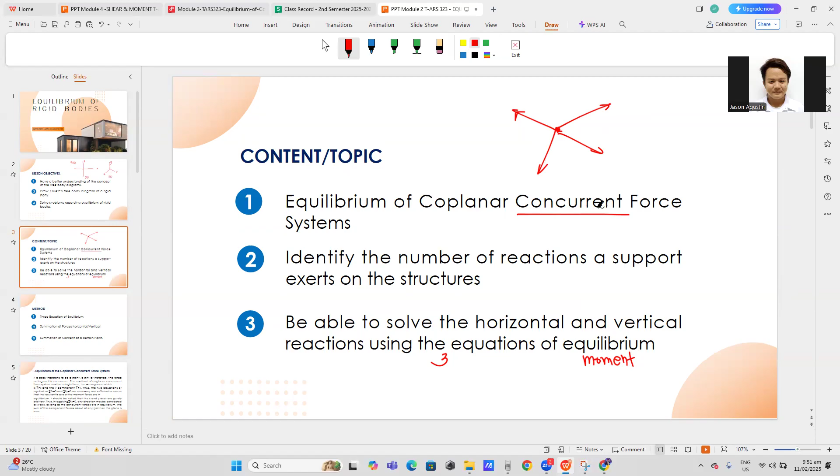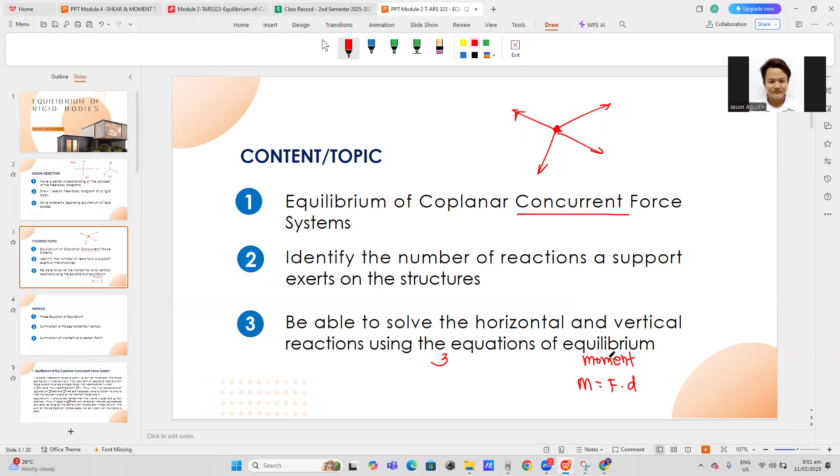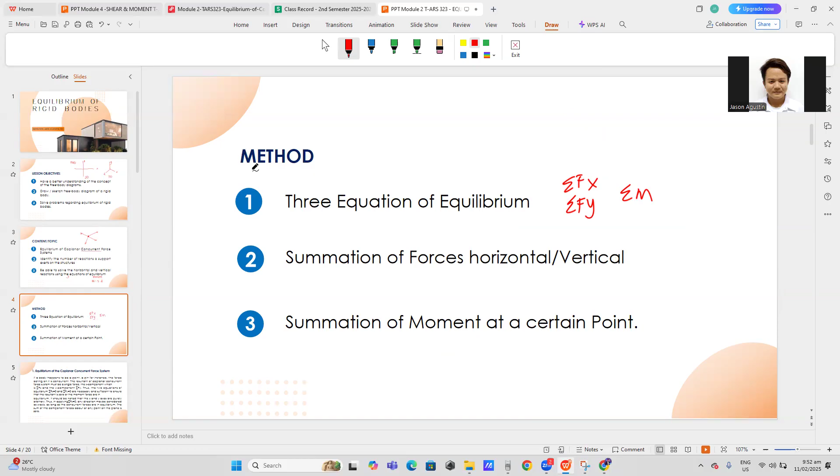So, method natin is yung three equation of equilibrium. So, yun yung summation of forces X, summation of forces Y, and summation of moment. Okay? Then, ito yung method natin, summation of forces horizontal, and vertical, and then summation of moment at a certain point. So, magsiset tayo ng reference natin. So, topic 1 tayo: equilibrium of the coplanar concurrent force system.

So, ito yung una, yung parang spider web. No? So, sabi niya dito, if a body happens to be a point, a pin for instance, the force acting on it is concurrent. So, kunyari ito, nakapin siya dito, no? Then, meron tayong mga forces dito. So, applicable lang itong equilibrium of coplanar concurrent force system kapag dalawa yung unknowns natin. So, pwede siyang dalawang forces yung nawawala. Pwede siyang isang forces and isang angle. Okay? And then, sabi niya dito, the resultant of coplanar concurrent force system must be a single point.

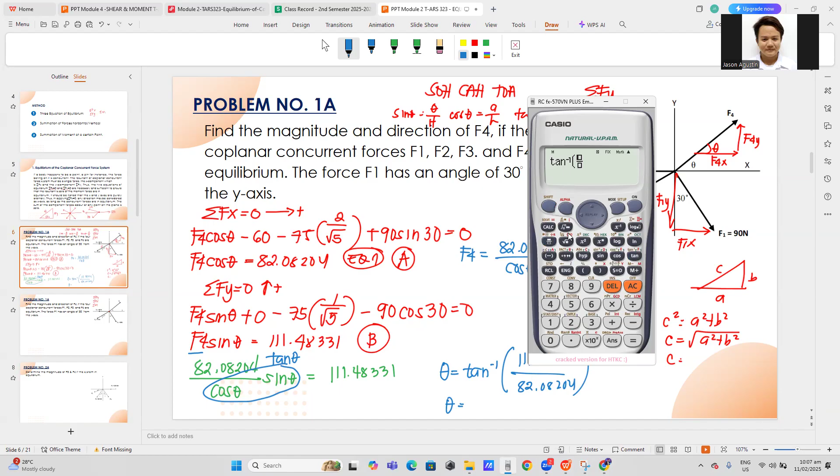So, arc tan. Yung ano natin, sa taas natin, where tayo, letter B yon and then A. So, ikakalk lang natin 111.48331 and then 82.08204. So, we have here 53.63682. Ngayon, stored lang natin yan sa letter C. Letter C ng calculator natin.

Ngayon, meron na tayong value or direction niya. Nakuha na natin to direction. Kunin naman natin yung magnitude. Kayo bahala if saan, doon sa equation 1 or equation 2. So, pakita natin sa equation 1. Ito yon, no? Lagay ko lang dito.

Aware ako na yung 82 ko is yung A all over cosine theta. Yung theta ko is letter C. Yan. So, enter ko lang. So, o ano ko muna, i-check ko muna kung nandun yung value. Ikakalk ko, yung A ko is 82. Then yung C ko is 53. So yung sagot natin is

138.44128. So ito na yung value ni F4 natin. Okay, so ito na rin yung sagot natin isa.

Paano naman kung equation 2 yung ginamit natin? Kulay green na dito. F4 equal to 111.48331 or yung letter B natin all over sine theta. So lilitaw dito, parehas sila. Ayan, parehas sila.

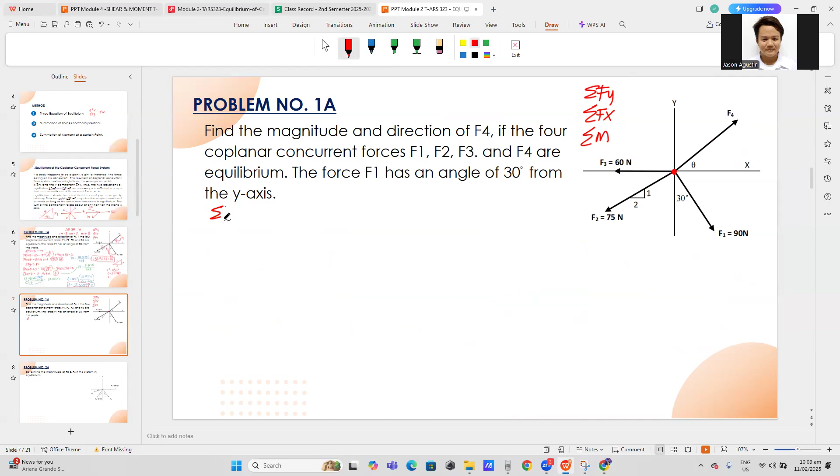So dito tayo. Ang ginawa lang natin dito, summation of forces x equal to 0. Lahat na papuntang right ko is positive. So yung F4 ko, lalagay ko lang dito is F4x. So aware ako na x component yan. Pero kanina ginawa ko is cosine siya. Ngayon, apply lang natin lahat yung ginawa natin kanina.

So negative 60 ito. Then negative 75. Then meron tayong 2 all over square root of 5 to, tama ba? Yan, square root of 5. Then positive 90. Yung relation niya is ano siya, opposite. So, meaning sine to. Sine 30 equals 0.

So, yung F4x ko is equal to, yan pa rin naman yung kanina, di ba? Wala naman nagbago. Different approach lang naman yun. So, ito yung alpha A ko or stored ko ulit sa alpha A. Ayan. So, 82.08204. So, letter A yan, no?

So, ngayon, summation of forces y equal to 0, upward ko is positive. We have F4y, positive yan kasi nga upward siya. Then, we have negative 75, 1 all over square root of 5, minus 90 cosine 30, equal to 0. So, yung F4y ko is equal to, so, dilipat ko yan magiging positive.

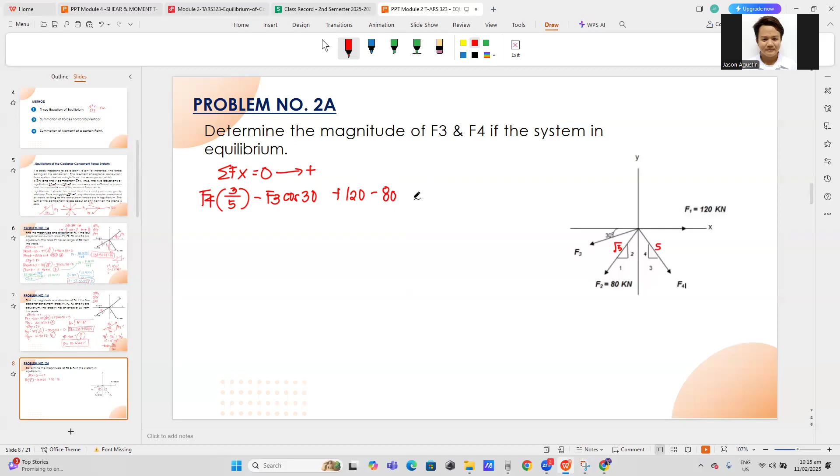So plus 120, since it points right, then minus 80 since it points left. And what's its X component? It's 1 over square root of 5, equal to 0.

So for F4, the value of 3 over 5 is 0.6. Let's just divide, so it's 0.6, minus F3 cosine 30. Now I'll transpose this, including their sign. So this 80, negative 80, becomes positive. So 80 times 1 over square root of 5, minus 120.

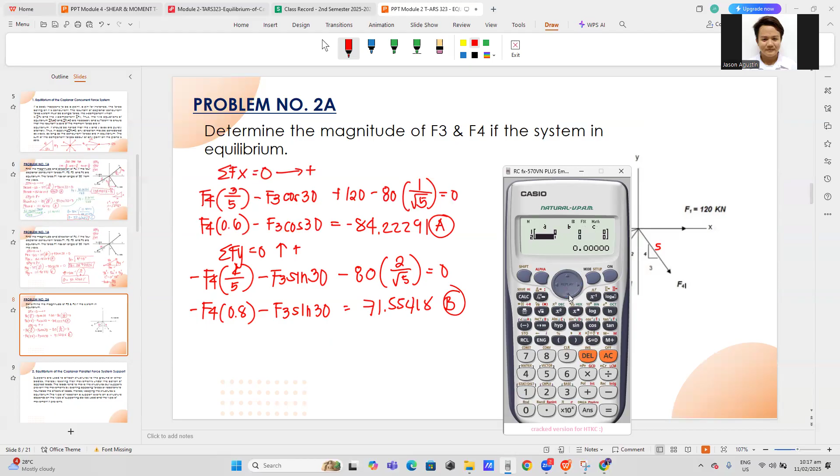How do we calculate directly? If your calculator looks like this, go to mode, then equation. There, number one, two equations two unknowns. So it's A, B, C, meaning our equation is AX plus BY equals C.

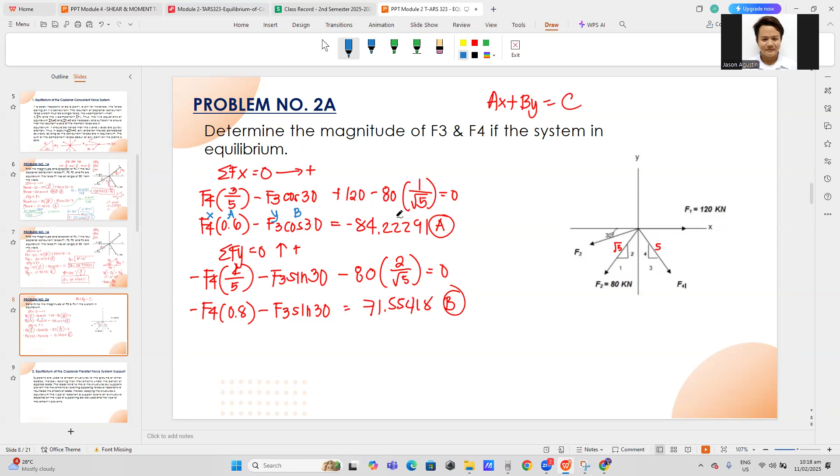Where A is the coefficient of X, and B is the coefficient of Y. So this becomes our X. Let me draw it out. This becomes our A, this becomes our X, since those are our unknown values. Then here, this becomes our B, the cosine term, this becomes our Y, since F4 and F3 are unknown. And C is the constant.

Okay, let's just input this. Take note, it needs to be arranged: F4 should go in column A, F3 should go in column B on the calculator, and C is our constant. So 0.6, then negative cosine 30.

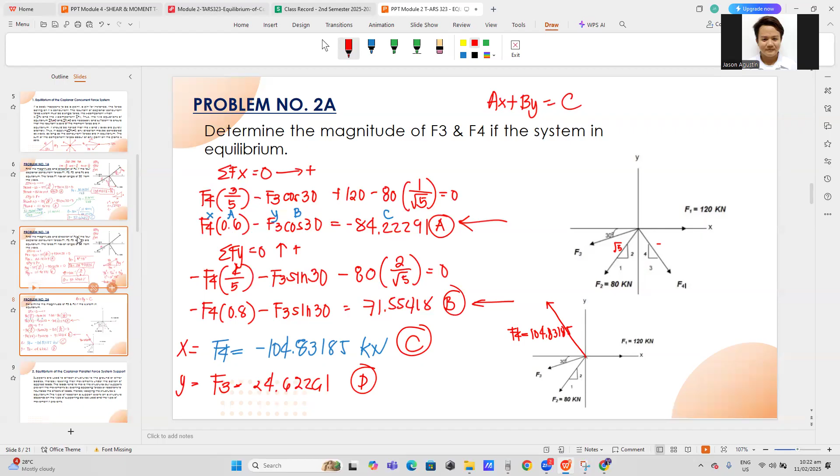Support are used to attach structures to grounds or other bodies, thereby resisting their movements under the action of applied loads. The loads tend to move the structure but support prevents the move by exerting opposite forces or reaction to neutralize the effect of loads.

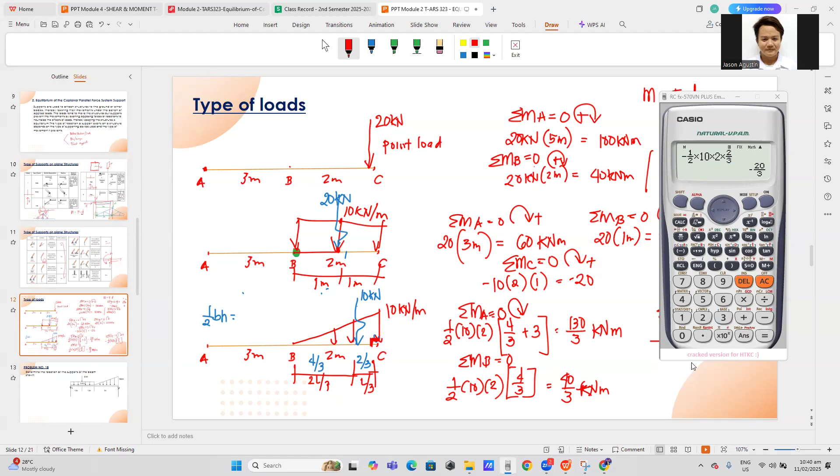Paano naman kapag nag-moment at C ako? Moment at C, lahat ng clockwise ko is positive. So ngayon, yung rotation niya from point C is negative. So negative 1 half, 10 multiplied by 2. Distance niya is yung 2/3 natin. So we have here negative 1 half multiplied by 10 by 2 multiplied by 2 over 3. So negative 20 over 3.

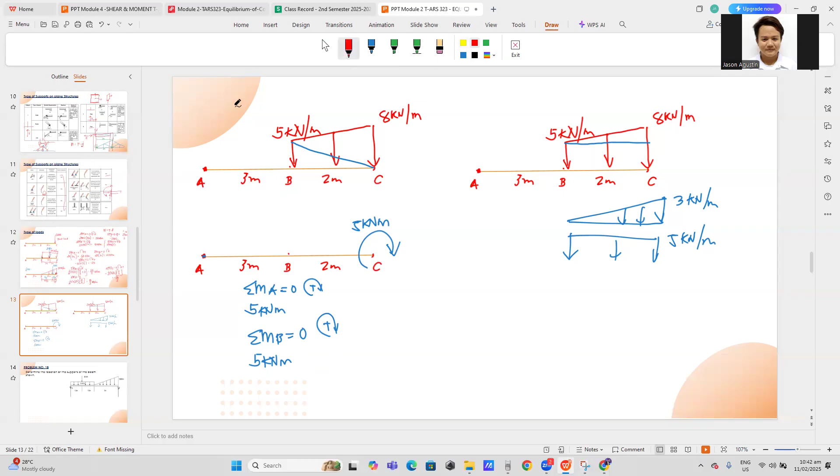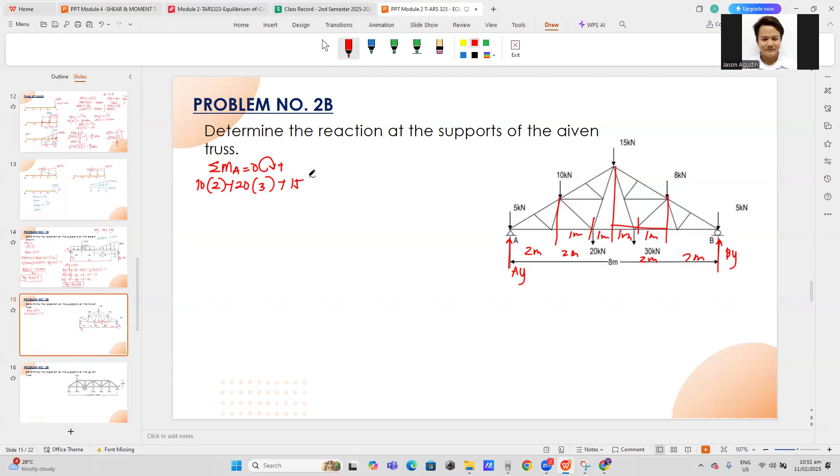So, summation of moment at point A equal to 0. Clockwise ko is positive. So, yung 5 na to, wala siyang distance, so 0 yan. Dito tayo sa 10. So, 10 multiplied by, ang distance niya is 2 meters. And then, itong 20 natin sa ilalim, ang distance niya is 3 meters. So, plus 20 times 3 meters. Then, yung 15 natin, plus 15, distance niya is 4 meters.

Then, itong 30 natin sa ilalim, distance niya ilan? 4 plus 1, plus 30 times 5 meters. Then, yung 8 kilonewton natin, plus 8 kilonewton, distance niya from point A is 6 meters. Then, yung 5 natin sa dulo, plus 5 times 8 meters. And then, yung BY natin, yung ikot niya is counter. So, negative BY multiplied by 8 meters equal to 0.

So, yung BY natin times 8 meters equal to, calculate ko lang yung value na to. And take note, class, nilipat ko na siya, so lahat ito positive. 10 multiplied by 2 plus 20 multiplied by 3 plus 15 multiplied by 4 plus 30 multiplied by 5 plus 8 multiplied by 6 plus 5 multiplied by 8. So we have 78. Okay, double check na lang.

So 20 plus 60 plus 60 ulit plus 150 plus 48 plus 40. 78? Ano mali ko kanina? So 10 multiplied by 2 plus 20 multiplied by 3 plus 15 multiplied by 4 plus 30 multiplied by 5 plus 8 multiplied by 6 plus 5 multiplied by 8. So, 378 siya. I-divide ko lang ito ng 8. So, we have 47.25.

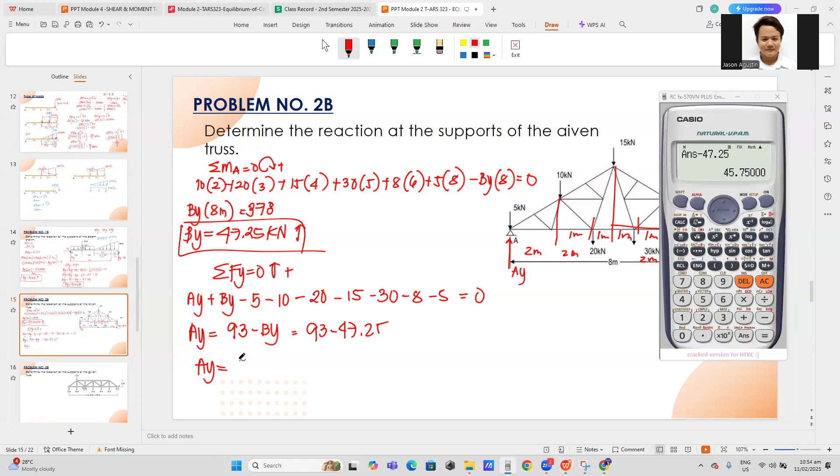So, yung AY natin is equal to, nilipat ko lang lahat ng negative, 5 plus 10 plus 15 plus 20 plus 30 plus 8 plus 5. So, we have 93 minus BY, or 93 minus 47.25. So, AY is equal to 45.75 kilonewton upward. Basta alam nyo kung paano umiikot at yung mga distance, kayang-kaya i-solve to.

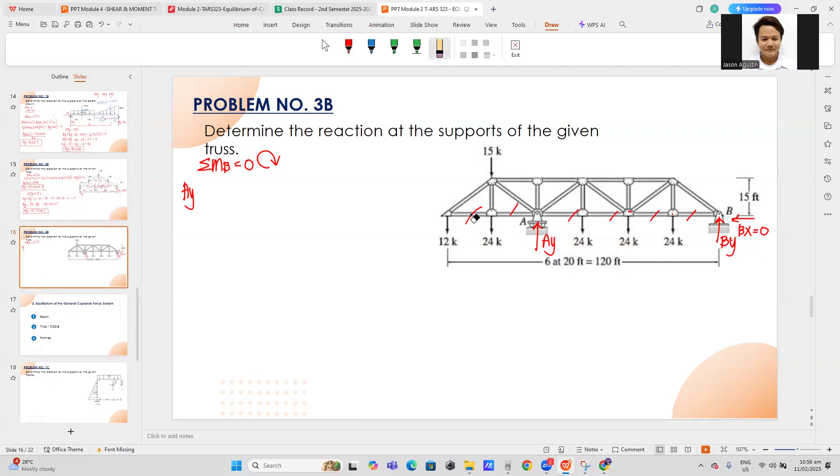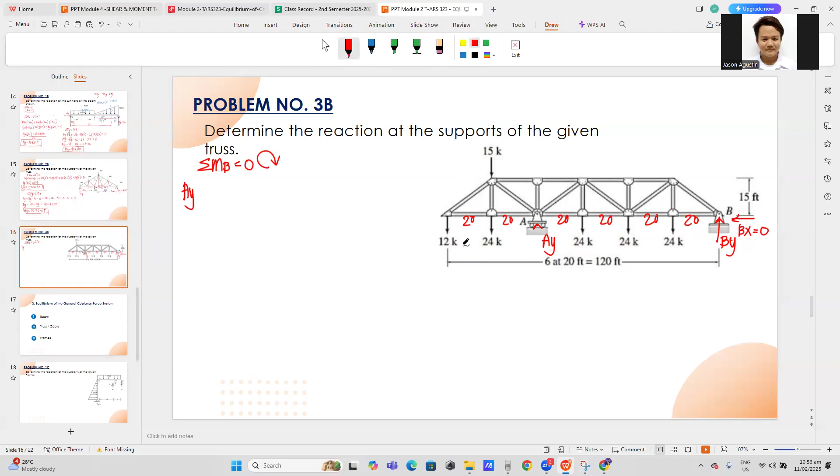And then, what about our forces? All of them are counter, so negative 15 or 12, let's say 12. Its distance from point B is 120. Since they have the same distance, we can add them. So negative 15 plus 24, then multiply by 100 feet.

Then let's go to the 24, 24, 24 - the fourth 24, so negative 24. Its distance from point B is 60. So the second one, or the second 24, negative 24 multiplied by 40. Then next is negative 24 multiplied by 20 feet equal to 0.

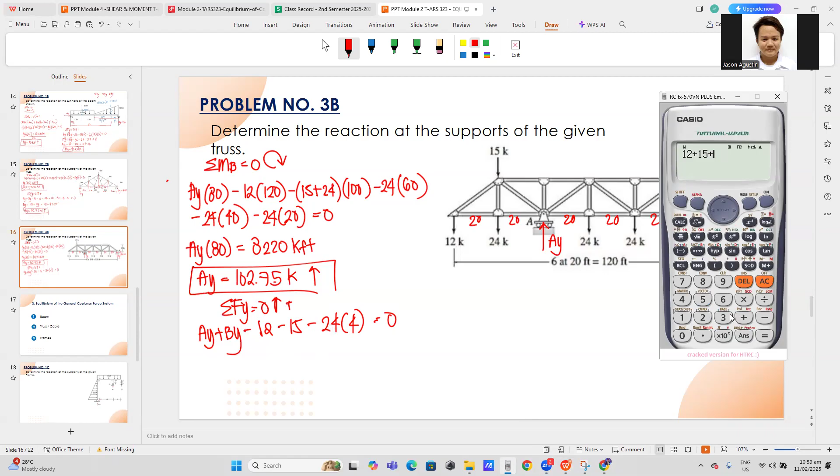So let's move all the known values. So 12 plus 15 plus 24 multiplied by 4, we have 123. So AY is equal to 123 minus BY. That's BY, what we're looking for. Reversed.

So BY is equal to 123 minus 102.7. So our BY is equal to minus... we have 20.25 kips. Since it's positive, our assumed direction is correct.

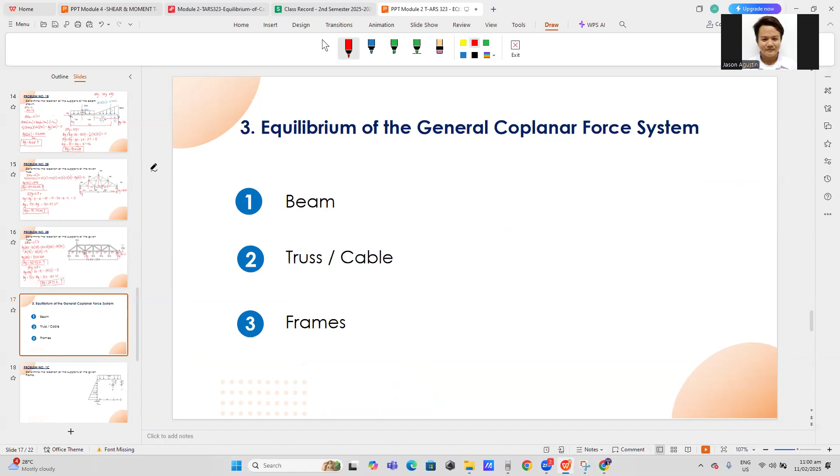Okay, so what's our last topic for this module? Equilibrium of general coplanar force system. It includes beams, trusses, cables, and frames - all of those, including our horizontal and moment equations. Let's go to our next problem.

Problem number 1: determine the reaction at the supports of the given frame. So this is our frame. Now let's identify the values. I see this is 18 feet, and this is also 18 feet.

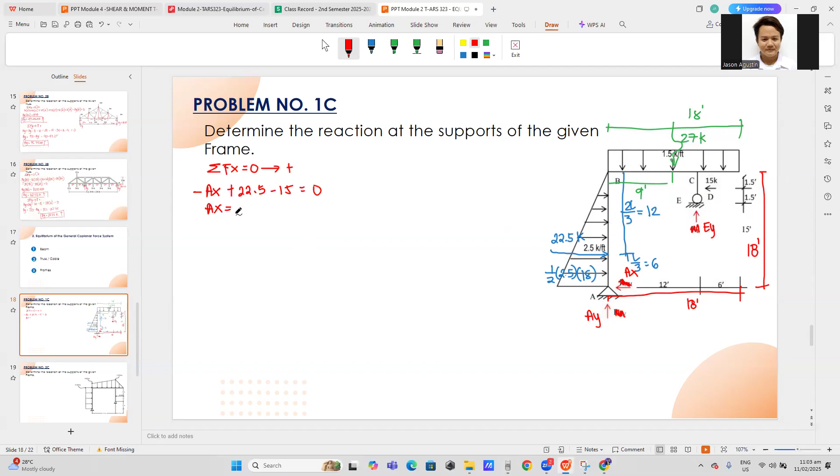Now, summation of forces X. So we have negative AX, since it's going right - actually going left. Then the right one is this triangle, so plus 1/2, or let's just use the 22.5. 22.5, then minus 15 equals 0. Then AX is equal to, moving the minus, 22.5 minus 15... we have 7.5 kips, and it goes to the left.

Ngayon, magmo-moment na tayo para makakuha tayo ng isang reaction. Summation of moment at point A equal to 0, clockwise ko is positive. Unahin ko muna yung triangle. Yung triangle natin is 22.5, and distance niya from centroid to point A is 6 feet. Mas maganda kung marunong kayong mag-sketch para di kayo malito.

Yung rectangle naman is plus 27, distance niya from point A is 9 feet. Then yung 15 natin, minus yan, minus 15, distance niya from point A is 16.5.

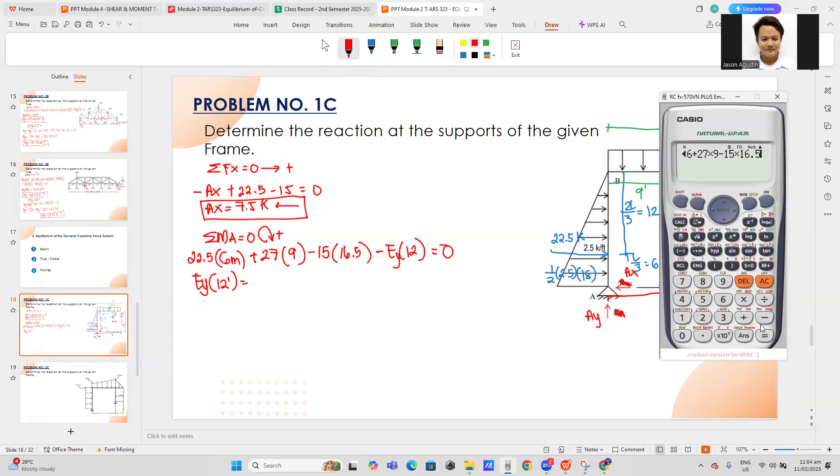Yung EY natin, yung ikot niya is counter din siya. Negative EY multiply by 12 equal to 0, so makukuha natin yung EY natin. EY multiply by 12 feet pa to. 22.5 multiplied by 6 plus 27 multiplied by 9 minus 15 multiplied by 16.5. So we have 130.

Let me just double check, baka kasi mali. Tama naman. 22.5 multiplied by 6, plus 27 multiplied by 9, minus 15 multiplied by 16.5. We have 130.5 k feet to.

Divide lang natin siya ng 12, kasi nga distance ni EY from point A is 12. So we have EY is equal to 10.875 K upward yan. Double check ko lang, baka kasi mali.

Ginagawa ko lang naman na mabilis yung ginagawa ko ngayon, wala naman akong ginagawang kababalaghan dito.

Ngayon, meron na tayong isa. Apply naman natin yung isang method, yung summation of forces Y equal to 0. Lahat ng upward ko is plus positive. So AY plus BY, at yung mga vertical natin, ito lang yung 27, so minus 27 equal to 0, kasi nga yung dalawa natin is horizontal sila. Yung AY ko is equal to 27 minus BY or 10.875.

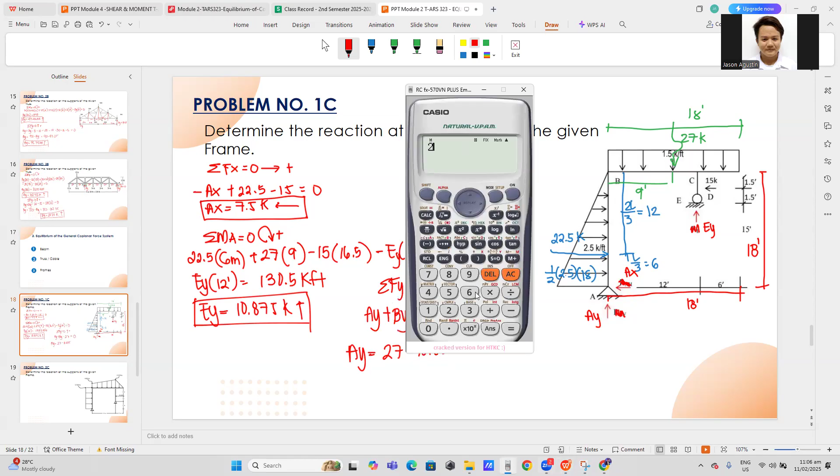27 minus 10.875. 16.125 k, upward din yan.

Kung di kayo sigurado dito, gawin nyo, mag-moment naman kayo dun sa point E. Kaso risky yon, kasi nga gagamitin mo yung value ni AX. Kapag hindi ka sigurado sa value ni AX, mali na. Mas maganda, kung saan marami yung unknowns natin, dun kayo mag-moment. Kung given lang ng forces natin or support natin is pin and roller, sa pin kayo mag-moment para dalawa kaagad yung nawawala.

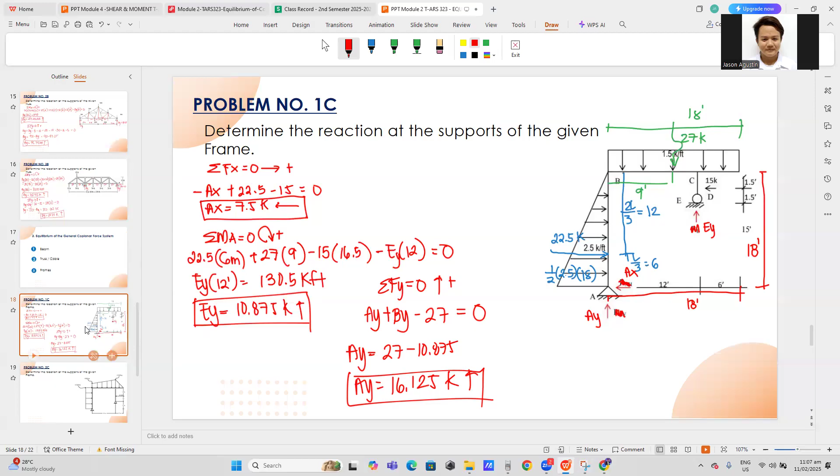Next tayo, ito. Medyo madugo to, pero kayang-kaya naman to. Kunin lang natin yung area na to, alam po ito is 4 meters to. 1.5 is 3 meter plus 1 meter, so 4 meters siya. 12 multiplied by 4 is 48.

Dito siya nag-a-act sa gitna. Dito naman, atin ko to, i-attach ko lang dito. Yung distance natin is 2.25 meters. Ngayon, anong area natin? Is 8 kN/m multiplied by 4.5, so we have here 36.

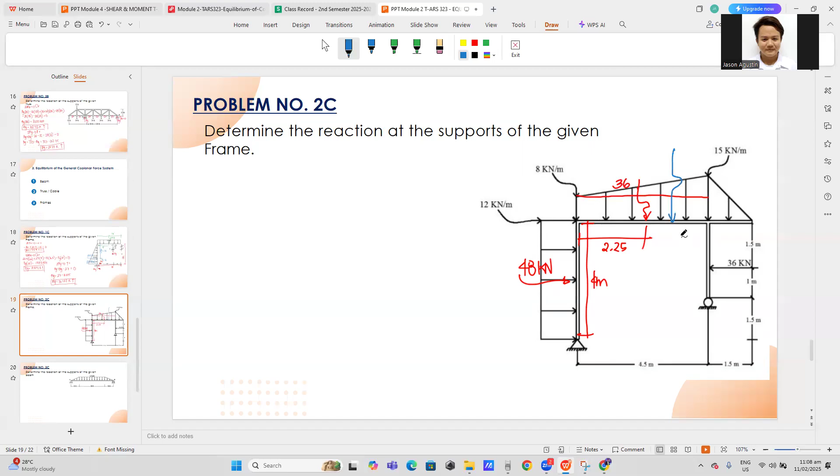Ngayon, paano naman yung triangle? Triangle natin dito siya nag-act, so L over 3, 1.5 ito, and then dito is 3 meters. Do the math, kasi nga kukunin mo yung L over 3 dito, then 2L over 3, kasi nga nandito yung mataas na triangle.

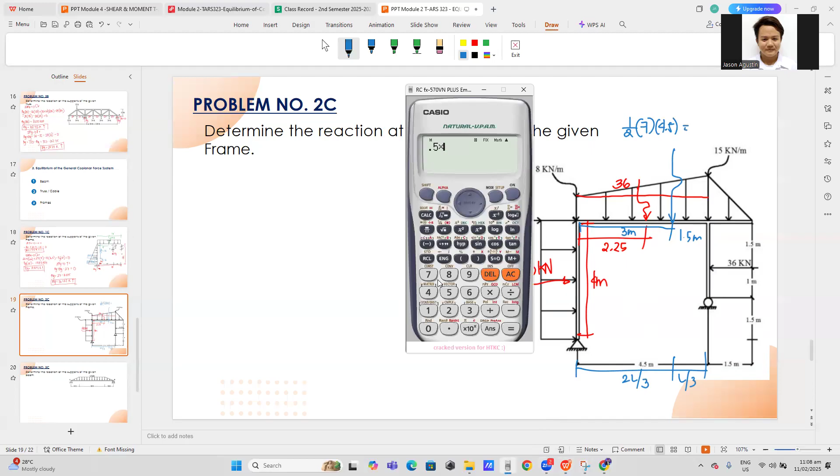Ngayon, paano natin kukunin yung triangle o yung area ng triangle? 1 half, 15 ba siya? Hindi siya 15, 7 lang siya, multiply by 4.5. 1 half multiplied by 7 multiplied by 4.5, we have here 15.75, yung value natin dito is 15.75.

Ngayon, dito sa isang triangle naman, nag-act siya dito. Nakikita naman natin by using L over 3 and 2L over 3, ito is 0.5 to 1 meter.

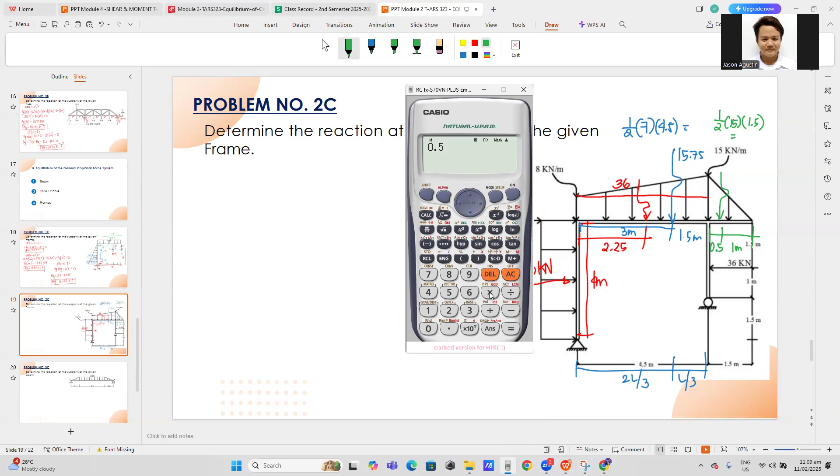Okay, ngayon, ano yung magnitude natin dito, kunin natin. 1 half 15 multiplied by, bakit 15 na siya? Hindi naman siya, triangle siya po, then 1.5. So 0.5 multiplied by 15 multiplied by 1.5. 11.25 yung magnitude niya.

Iniiba-iba yung kulay niya para ma-visualize nyo, pero kapag tayo nagsasolve, pwede rin kayo gumamit ng ibang kulay para mas maganda.

Ngayon, mag-moment ako saan? O ano muna, summation of forces X, kasi wala naman siyang kaagaw, unlike do sa vertical natin, meron siyang dalawa. 0 equal to, papuntang right ko is positive.

Ngayon, wala tayong naka-assign na point, so sabihin natin point A ito, point B ito, point C ito, point D ito, and point E ito. Ako na yung nag-assign, pero kung wala, kayo yung mag-assign. Usually, binibigay ko naman yung mga point na yan.

Sa horizontal natin, siyempre, papalitawin natin yung mga reaction natin. Itong point A natin, meron tayong pin, so meron siyang vertical, AY. Sabihin natin papuntang left siya, ina-assume ko lang siya, na AX dito. Then yung AY natin is upward siya.

Kapag mali yung direction or mali yung na-assume ninyo, and then nakuha yung value is negative, meaning mali lang yung direction niya.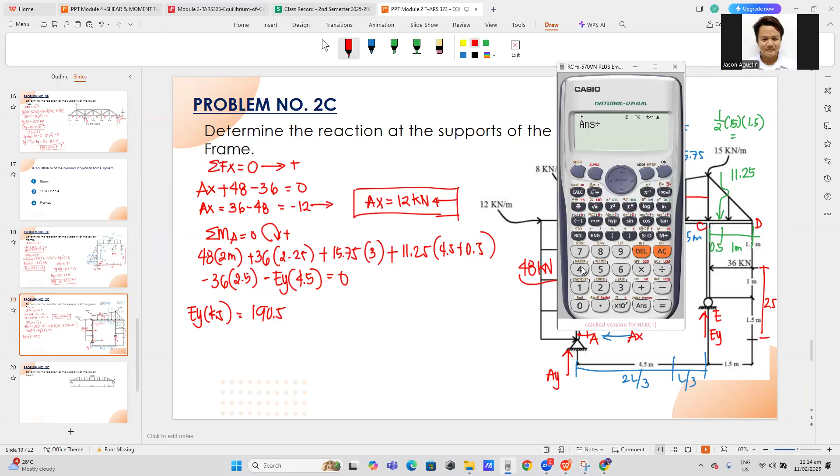48 multiplied by 2, plus, ito nilipat ko ng EY, kaya naging siya positive. So calculator lang natin: minus 36 multiplied by 2.5. Ito lang natin, so 190.5, then divide lang natin siya ng 4.5. Ayan, so meron tayo ditong EY is equal to 127 all over 3.

Equal to 42.3333 kilonewton and then upward yan. So ito na yung sagot natin isa.

Okay, ngayon yung summation of forces Y naman is equal to 0. Upward ko is positive. We have here AY plus EY minus 36, ayan yung kulay red. Then yung kulay blue natin, yung triangle is 15.75. Then yung kulay green natin, yung triangle na isa, 11.25, equal to 0. So yung AY natin, makukuha natin, pagka-add lang natin yan, 36 plus 15.75 plus 11.25.

63 siya, minus EY, so ma-minus lang natin ito, minus 127 all over 3. Mali, 63 minus 127 all over 3, meron tayong 62 all over 3, or equal to 20.6667 kilonewton upward.

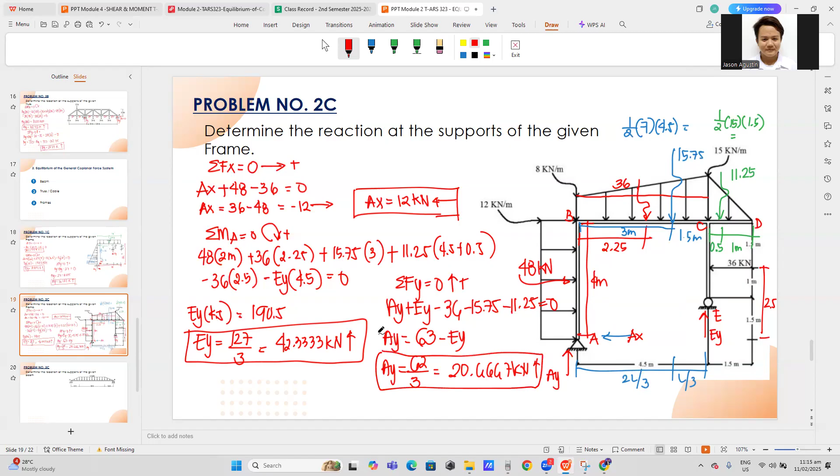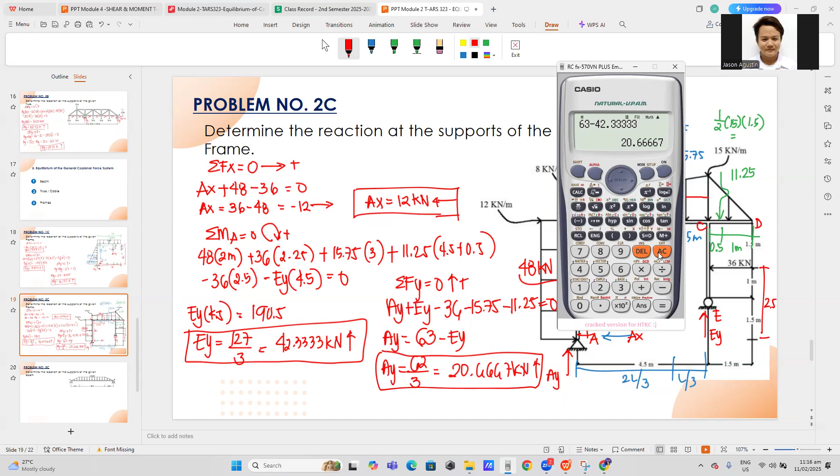Bakit yung ginamit ko yung fraction? Para walang decimal, na walang discrepancy, sakto yung sagot natin. Pero kung ginamit nyo itong decimal na to, hindi yung fraction, same rin naman. Mas better kasi nag-stored values tayo, tulad dun sa ginawa natin dun sa unang topic natin.

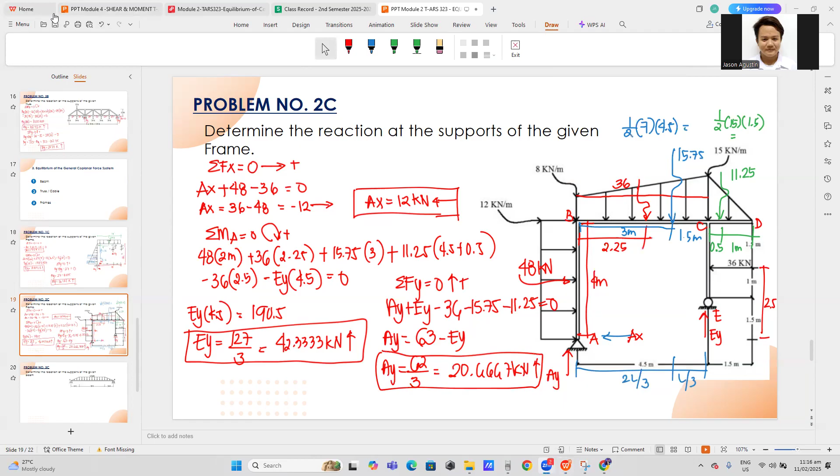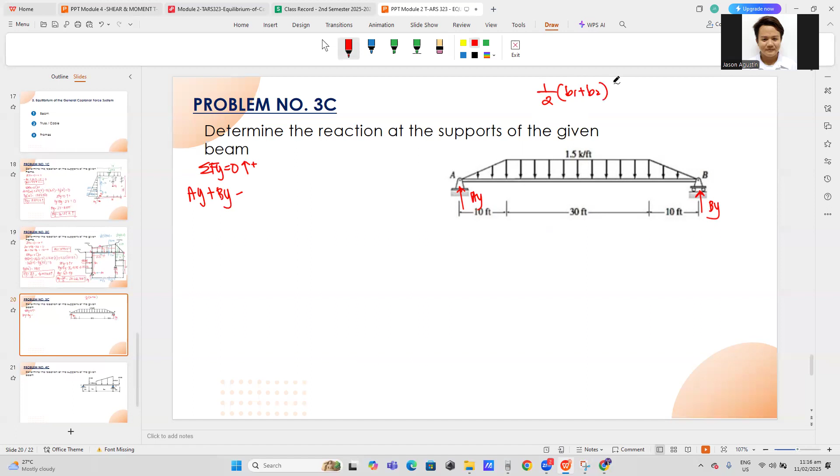So summation of forces Y lang tayo, equal to 0, upward. So alam natin, AY to, ito is BY. Dali lang to, no? Ngayon meron tayong AY plus BY minus, kasi nga downward ito. Kunin lang natin yung area ng trapezoid: 1/2 multiply by base 1 plus base 2, and then height. Yung base 1 natin, ito yon sa taas, base 2 natin, ito yon. So we have here 1/2, base 1 natin is 30, plus natin yung base 2 na 50, multiply by height na 1.5, equal to 0.

Then aware tayo class na symmetrical siya, so kapag symmetrical siya, meaning yung AY natin equal to BY. So pwede lang natin i-divide. Yung AY natin or 2AY is equal to 1/2 multiplied by 1.5 multiplied by 50 plus 30. Yan, di-divide 2 lang natin to, so 30 siya.

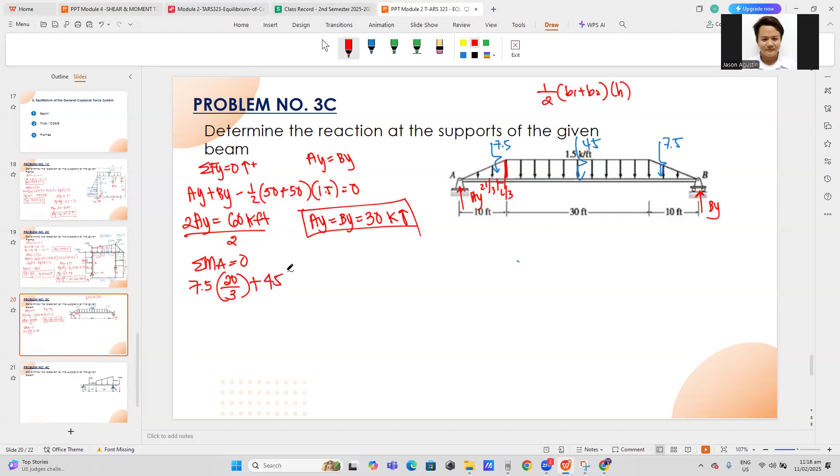So, dito, 7.5 positive yan. Distance niya from point A is 2L over 3. Kasi nga, dito yung mataas na triangle, no? So, dito yung L over 3. Ito yung 2L over 3. So, meron tayo dito 20 all over 3. Then, dito naman sa gitna, yung 45. Yung gitna natin is 25 feet from point A. Then, yung isa naman triangle is plus 7.5. Then, yung distance niya is 10 all over 3 plus 40.

Then, yung By natin, negative By multiplied by 50. So, yung By natin, meron siyang distance na 50 from point A. So, i-add lang natin to: 7.5 multiplied by 20 all over 3 plus 45 multiplied by 25 plus 7.5 multiplied by 10 all over 3 plus 40. So, we have 1,500 dito. Then, di-divide lang natin siya ng 50. So, By natin is equal to 30, sorry. Upward.

And then, mag-apply ka ulit ng summation of forces Y equals 0. Upward ko is positive. So, Ay plus By minus 7.5 minus 7.5 minus 45 equal to 0. So, yung Ay ko plus By is equal to 7.5 plus 7.5 plus 45, equal to 60. 60 minus By, or 60 minus 30. Yung Ay natin is equal to 30.

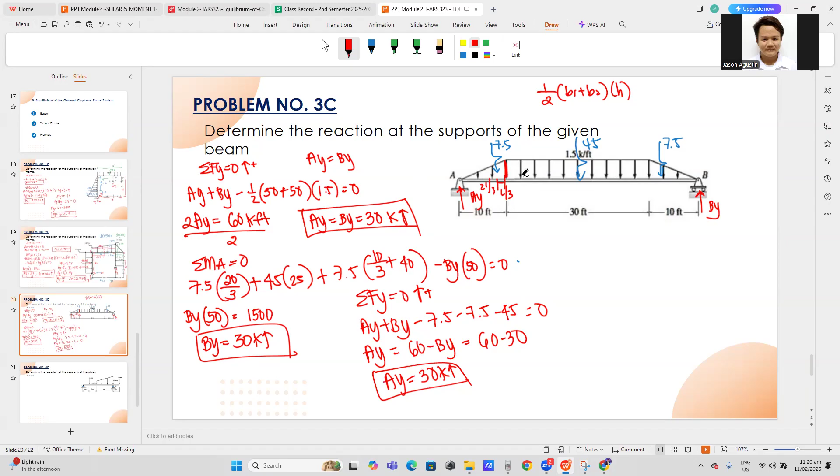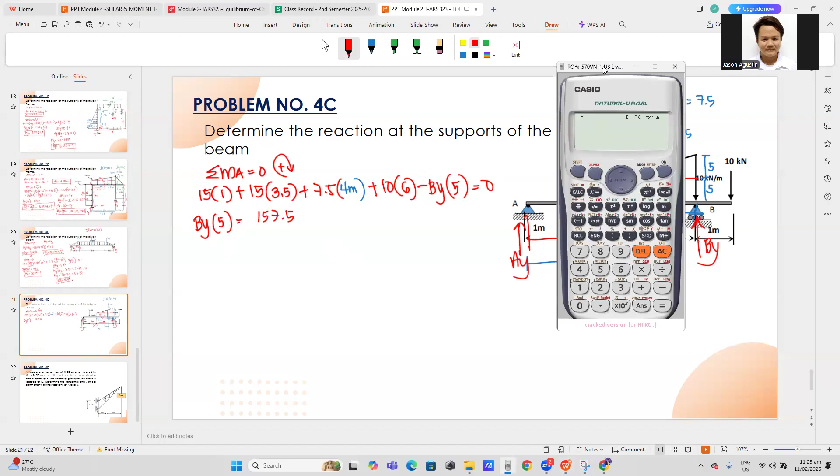15 times 1. Then ito 3.5. Then plus 7.5 multiply by 4 plus 10 multiply by 6. So divide 5 ko lang siya. So we have By is equal to 31.5 kilonewton upward. Ngayon, summation of forces Y naman tayo. Equal 0, upward ko is positive. So we have Ay plus By minus 15 minus 15 minus 7.5 minus 10 equals 0.

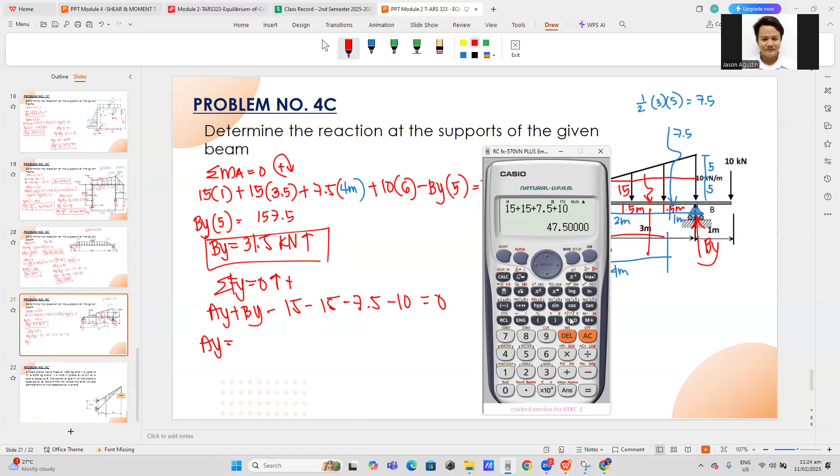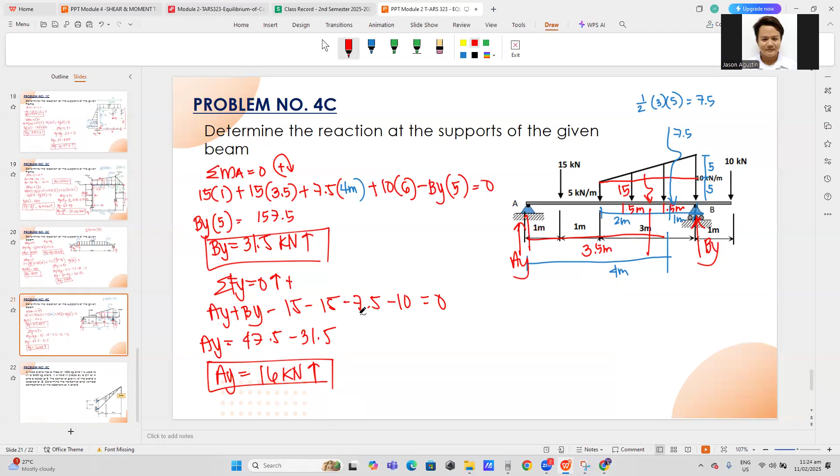So yung Ay ko is equal to 15 plus 15 plus 7.5 plus 10, so 47.5 minus 31.5. So we have Ay is equal to 16 kilonewton upward. So problem number 5 tayo, or last natin.

Dito, sabi niya dito, a fixed crane has a mass of 1,000 kg. So mass lang to, no? And it is used to lift a 2,400 kg crate. It is held in place by a pin at point A. So may point A tayo dito, point na pin, and a rocker at point B. So meron tayong rocker dito. The center of gravity of the crane is located at G. So dito daw yung center of gravity ng crane. Okay? Then determine the horizontal and vertical components of the reaction at point A and B.

So hinahanap lang natin yung reaction natin sa point A and B. So identify muna natin yung support. Ito, pin or hinge ito, point A. Then ito B natin is roller siya. So palitawin lang natin mga reaction. Ito papunta dito, yung AX. And then ito naman is AY. And then dito sa B natin, roller siya, perpendicular dun sa surface niya. So ito yung BX lang siya. Ayan.

So yung crane natin is 1,000 kg siya. Ngayon, kailangan natin itong i-convert into kilonewton or weight, yung dalawang ito, no? So 1,000 kg multiplied by the gravity 9.81 meter per second squared to make it newton. So 1,000 multiplied by 9.81. So meron tayong 9,810 Newton. Divide lang natin siya ng 1,000 to make it kilonewton. So we have 9.81 kilonewton.

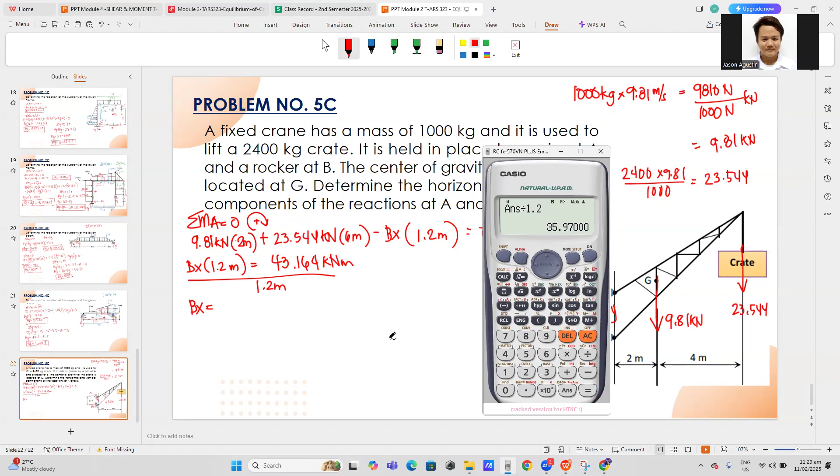So yung BX natin multiplied by 1.2 meters equal to 9.81 multiplied by 2 plus 23.544 times 6. So we have here 43.164 kilonewton meter. I-divide lang natin siya ng 1.2 meter. So BX natin is equal to 35.97 kilonewton, papunta siya sa right. So ito yung sagot natin. Tama yung assumption natin doon.

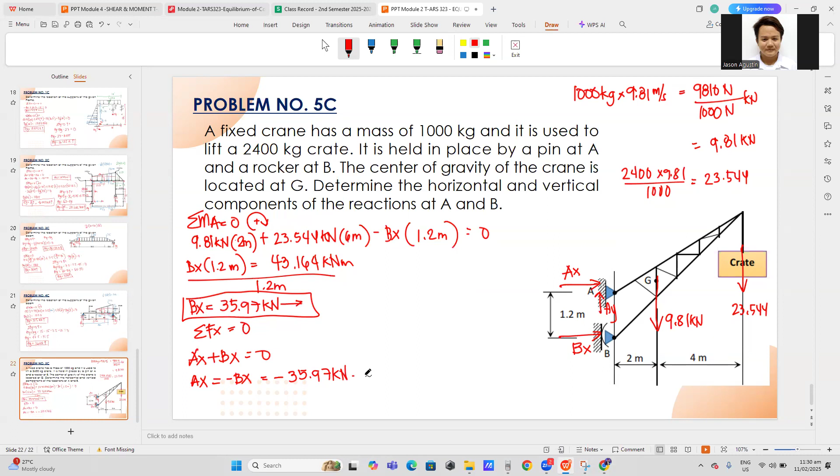Ngayon, summation of forces X muna. Kayo bahala kung ano, as long na yung moment nakuha na, makukuha nyo na lahat. Summation of forces X equal to 0. Pareho silang papuntang right, AX plus BX equal to 0. So AX is equal to negative BX, negative 35.97 kilonewton. Since negative siya, kailangan natin i-correct yung direction. So AX is equal to 35.97 kilonewton papuntang left. Meron pang isa natin kukunin, no?

Yung AY naman. Summation of forces Y equal to 0, upward is positive. So we have AY positive kasi upward siya, minus 9.81 minus 23.544 equal to 0. So AY is equal to 9.81 plus 23.544. So we have 33.354 kilonewton upward.

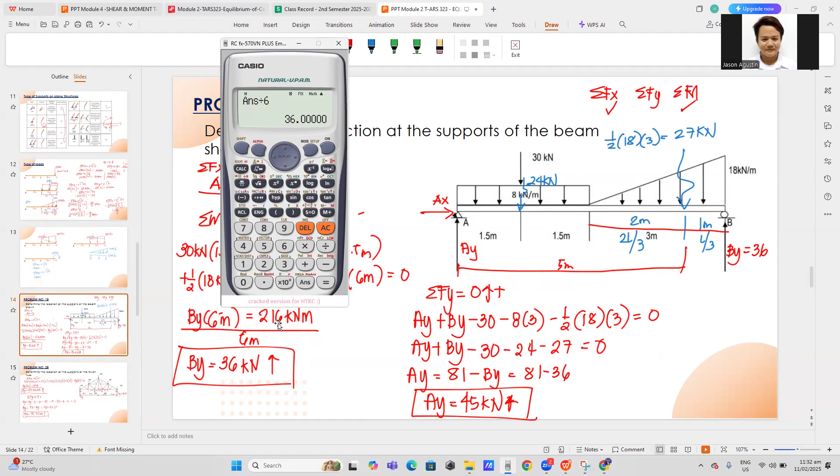So, 30 multiplied by 1.5, ito nga distance niya, plus 8 multiplied by 3 multiplied by 1.5, plus one half multiplied by 18 multiplied by 3, multiplied by 2 multiplied by 3 all over 3 plus 3. And then divide ko lang siya ng distance ko, 6. Kung sanay na kayo, mabilis na lang kahit calculator lang.